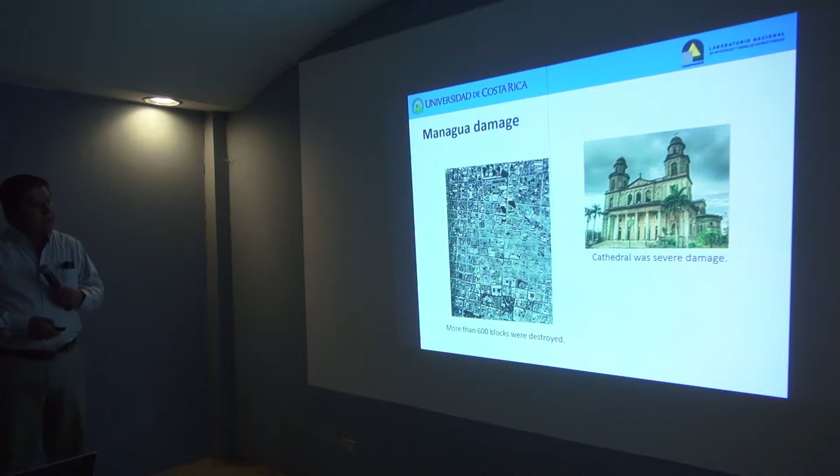Okay. More than 600 blocks in the center of the city were destroyed. The cathedral was severely damaged and still is in the same way. I was in Managua about a year ago, and you can see the cracks and everything is exactly the same. The major buildings in that area were like this, no more than 10-story height.

And for the ones that love baseball, Roberto Clemente died in that time in an airplane crash. He was bringing help to the people in Nicaragua.

We have our own earthquake in Tilarán, April 1973. Magnitude 6.5, depth 29 kilometers, 23 persons dead. The cathedral was damaged, and Tronadora is the small town right there. The Tronadora church collapsed, and it's right here. So you see, Managua is here, Tilarán was here. So it seems to me that at that moment, people felt that the earthquakes were coming to San Jose. And we decided to do something.

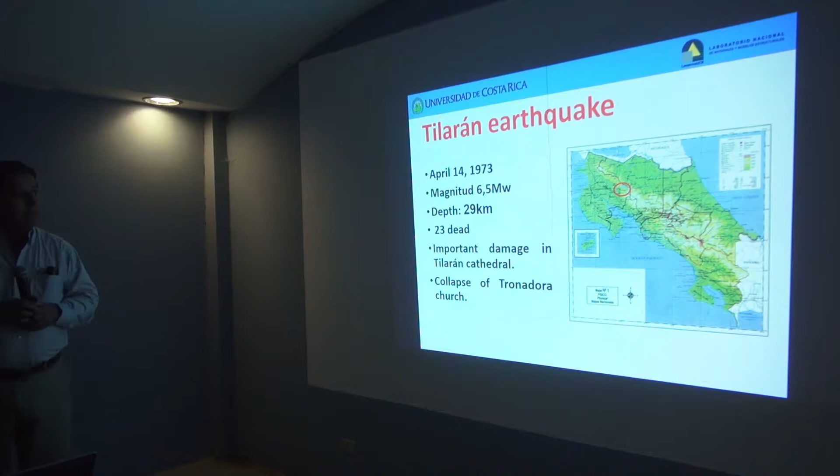At that moment, the civil engineering school had a student finishing his master's degree in Berkeley. And the easy way to produce a seismic code was telling Jorge Gutierrez, his name, find everything that you can obtain in Berkeley and try to write something. And what is really nice is in less than 1 year, we have our first seismic code. It was really interesting. In 1986, we have the second one.

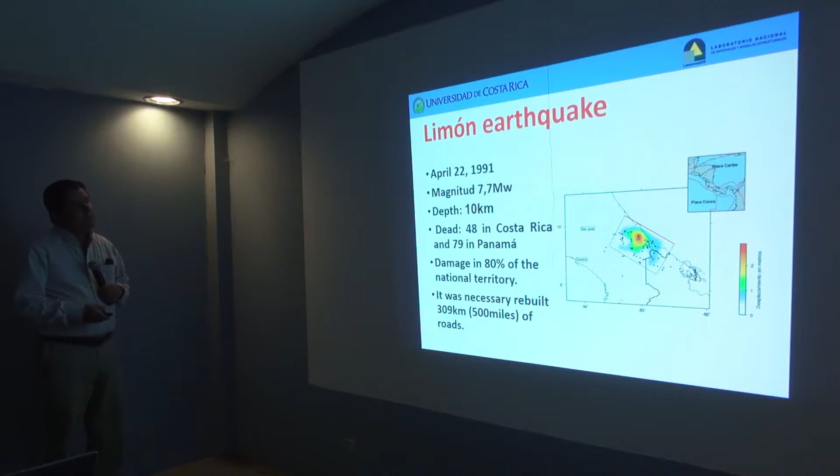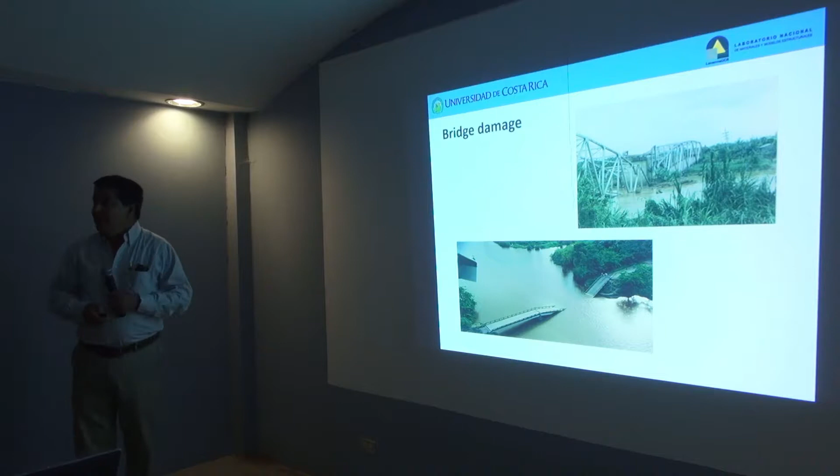The magnitude was really large, 7.7. 48 persons in Costa Rica and 79 in Panama were dead. This line is the border between Costa Rica and Panama. And there was damage in about 80% of the national territory. And we needed to rebuild about 500 miles of roads. A lot of bridge damage, infrastructure. You will see this tomorrow. Not the destruction, the road. It was not an easy way to learn about bridge design. And we have destruction in small buildings.

Okay. 2002, we have the third code, and for the first time we have commentaries. It is a completely new way to design. We introduced large changes in the masonry, concrete, and steel chapters of this code. And in 2009, we proved if that code was working or not.

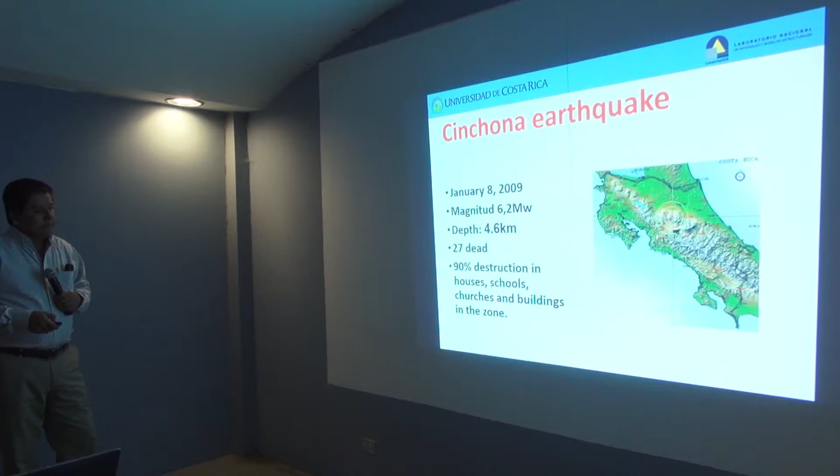We have the Cinchona earthquake. This is a rural area with a small population, small buildings, but you see the depth. Only 5 kilometers, it was at the surface. It was terrible in that sense. 90% destruction in houses, schools, churches, and buildings in the zone. And then we start learning.

We have houses like this. You will see masonry house number 1, number 2, number 3. And in this case, there was partial collapse of some walls and total collapse of some areas of the house.

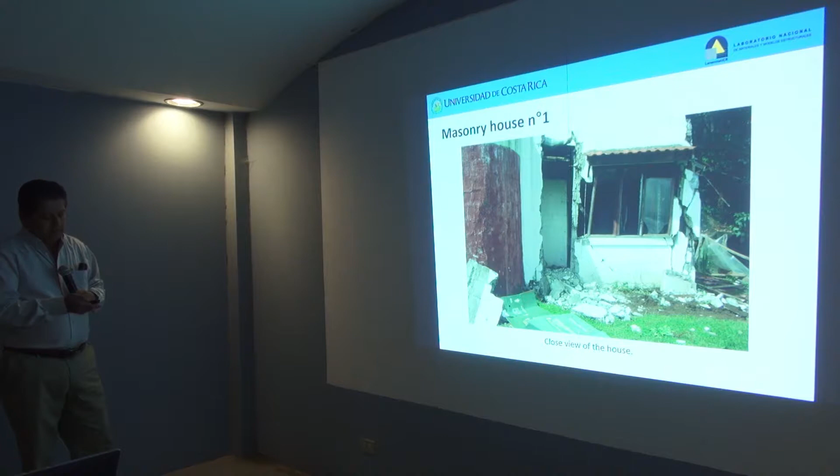Very poor behavior of the joints and the walls. And we started looking: what was wrong? The amount of walls that the house had in each direction was okay. So it was something really different. And we found these kinds of things.

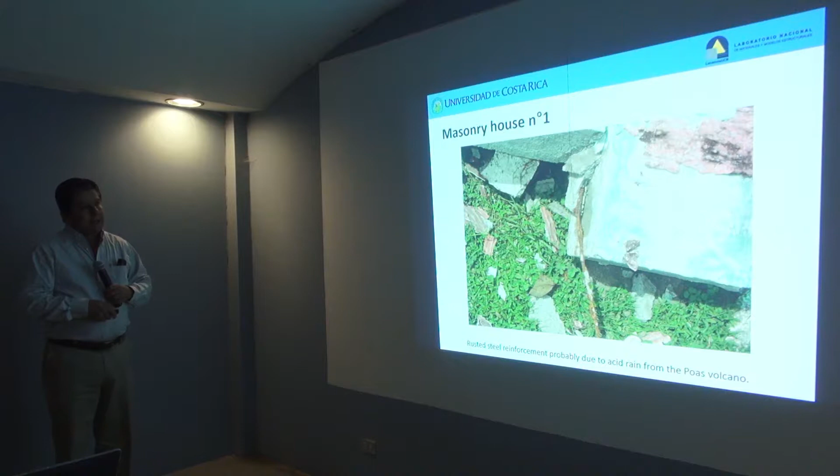The steel reinforcements inside of the masonry walls were completely rusted. And then we realized that the joints were not properly sealed. So when it rains, the water can get inside of the wall. And since these buildings are close to the volcano Poás, and we have acid rain right there, the water gets inside and starts corroding the steel reinforcement. So that explains why some walls collapsed.

It's not because they were not properly built, but the problem was the steel reinforcement was not properly placed, and there was no reinforcement at the moment the earthquake hit the house.

This is house number 2. And here we have another problem. There is no horizontal reinforcement in the wall. There is not a proper beam at the top. There is no connection between one wall and the other. And of course, we can expect this kind of behavior.

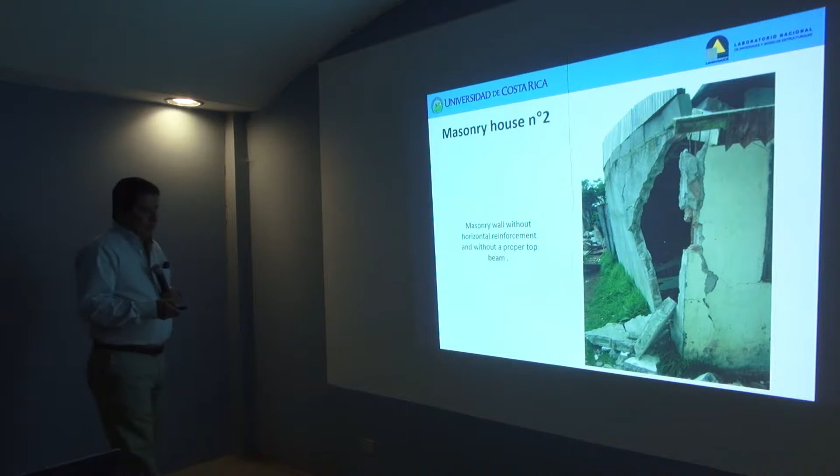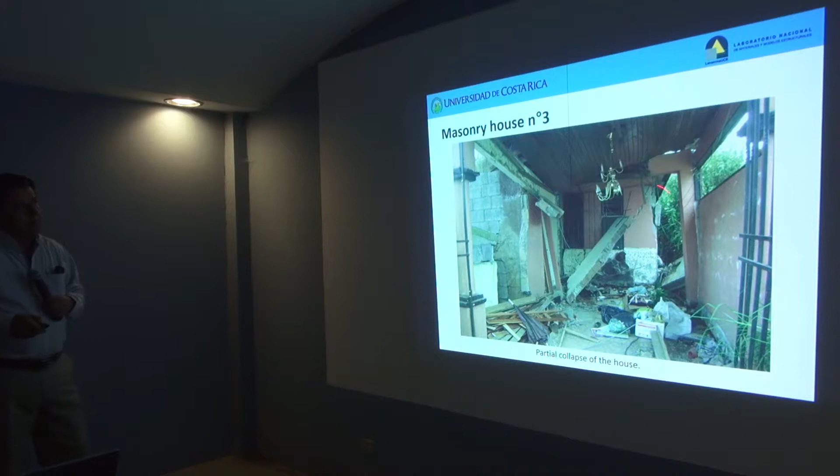This is a close look at that intersection. And you will find some vertical reinforcement, really small. And that gives you problems. House number 3, partial collapse. There were people injured in this house, and very poor details of the connections, the connection between the beam and the wall, and how the beam bears on these walls.

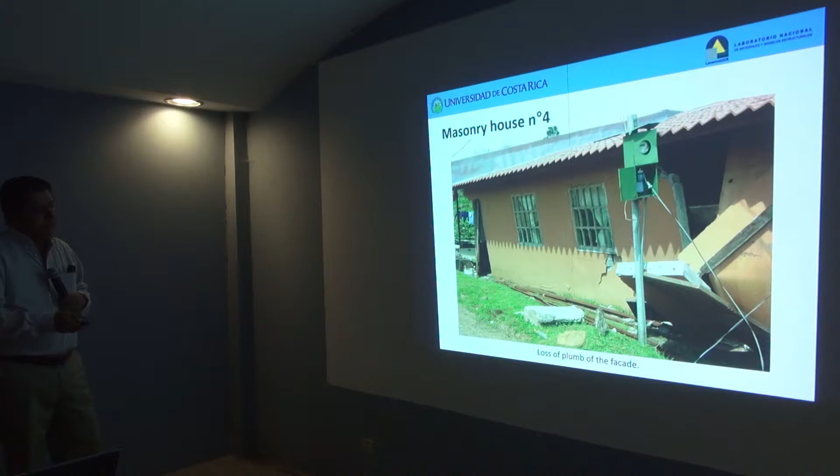Number 4, there were some pieces of the wall that were not connected to the column. And the quality of this steel reinforcement was something that got our attention, because you see the 4 steel rebars were broken. And it's not a good thing. Main road problems and soil failures in the entire area.

Silo collapse. These guys used to buy this kind of silos in America, but they bought them by cost. They were not concerned about earthquakes. I've researched this company, and they offer you low seismic silos, or medium or high. The cheapest are, of course, the lowest.

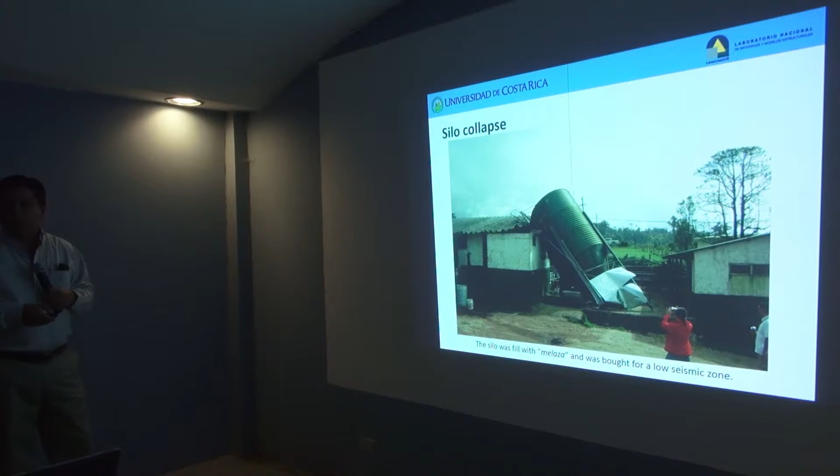So what happened is that the owners of these farms bought the cheapest silo, and these were designed for corn or some kind of thing. And instead of that, they use melaza, that is a mix of honey and other things to feed the cattle. And the weight is completely different. And of course, we found about 12 of these silos with the same behavior. Tension anchor failure at the bottom, and cold-formed steel buckling on the braced frames.

2010, we have our fourth seismic code and the commentaries. This is still in use right now. We are working, and hopefully we will have a new code in 1 year. We will try to do that.

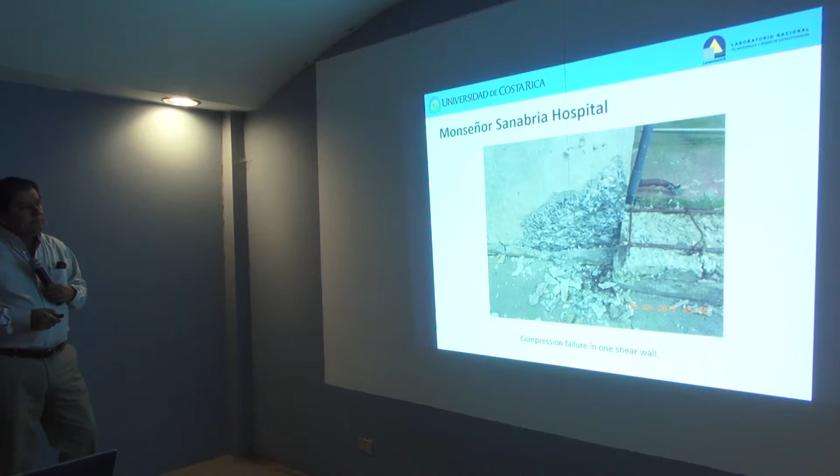8-story building. And the building originally was a concrete frame. It was retrofitted with shear walls. And this is the compression failure at the bottom of one of these shear walls. The emergency stairs have these beams and have a lot of shear crack failures. So everybody was afraid to use the emergency stairs. That's terrible.

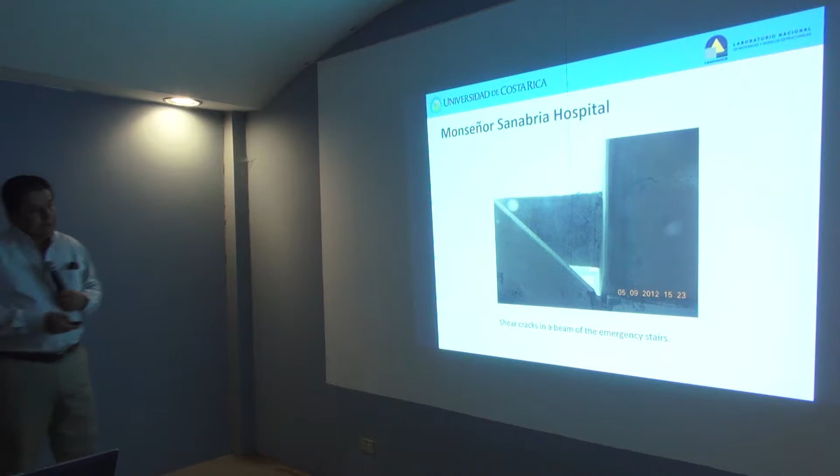The main stairs, this guy didn't understand what a proper design for shear is. You see, it's unbelievable that a beam of this height in a hospital has this kind of cracks. Okay.

The earthquake was early in the morning, about, if I remember, 7 in the morning. I was there about 3 p.m. It was chaos. There were engineers from the municipal government. There were engineers from the professional college. There were engineers from the equivalent to FEMA here. There were people from the hospital. Everybody was there.

And then I realized that I was the oldest guy right there. I tried to assign work for each one and get together. And it was difficult, but about 2 hours after that, we needed to meet with the medical staff and tell them you need to close the hospital.

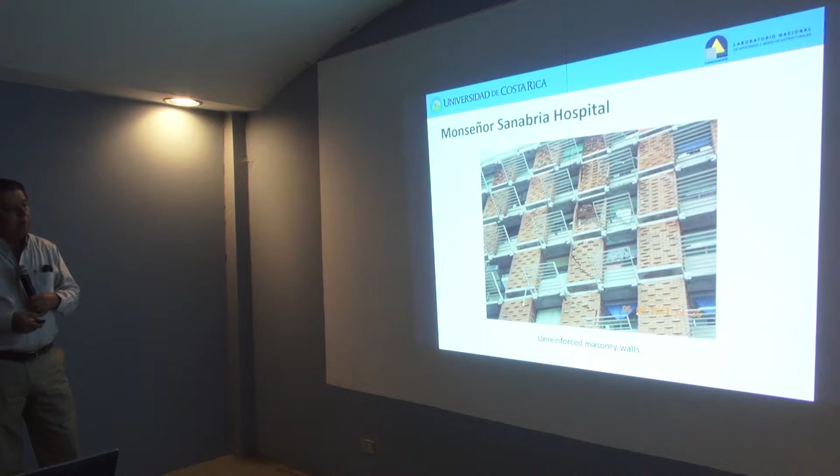After that, I received a lot of pressure. People telling me that's wrong, that's not. In the end, I made the good decision. Finally, they needed to throw out the building and start with a new one. And unreinforced masonry walls in a hospital. And of course, if there is no reinforcement, you will see all the shear behavior.

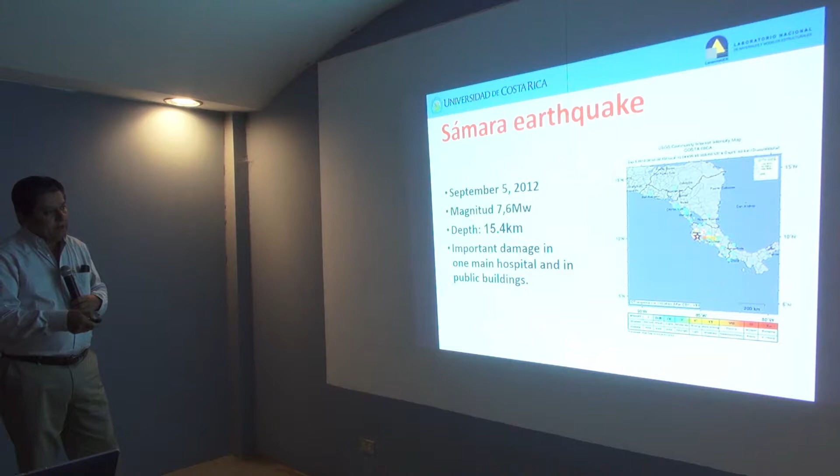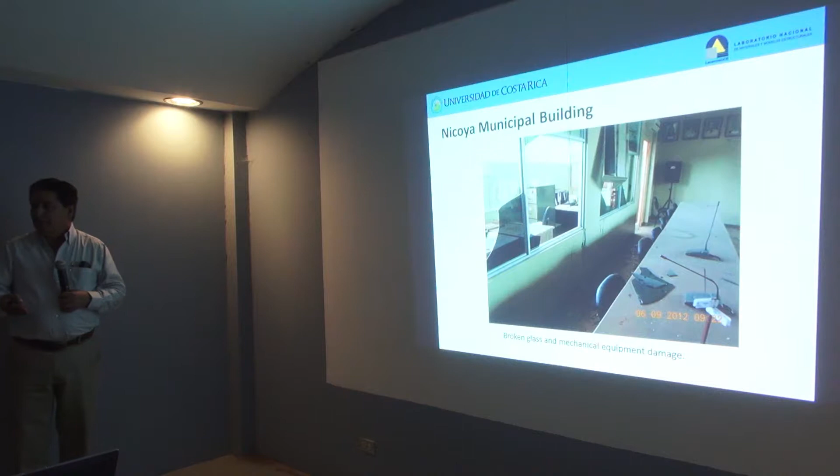This is a 2-story building where the municipal work. And it's a good example of something that we are working on right now, related to having some kind of a chapter in our code that takes care of the design of non-building structures and other things like ceilings, glass, mechanical equipment. You see, this is what we call secondary damage. It's not structural damage, but you cannot work after an earthquake with that kind of problem.

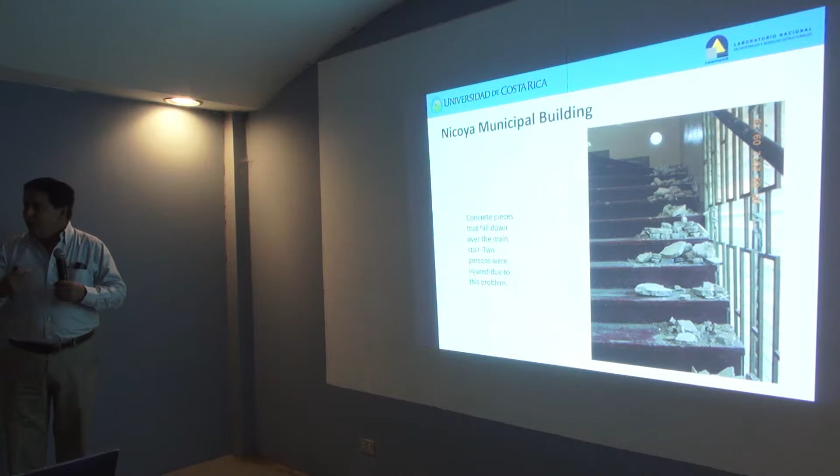There were a lot of people working in the second story. There were 2 people injured, and both of them had the same problem. They broke their arms because when they were coming down, they were protecting their head with their arms, and all these things were falling down. And a lot of broken windows that came to the sidewalk that is right here.

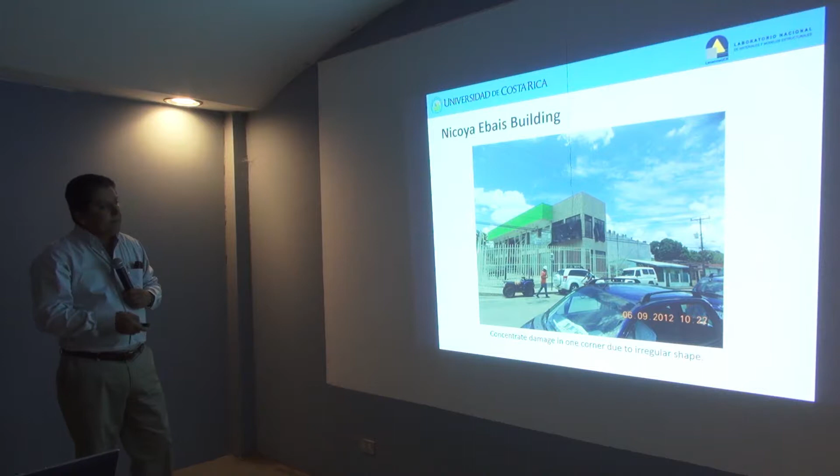This is another building in the same city, Nicoya Ebais Building, and it's a rectangular shape here. But someone had a good idea and tried to place these rooms right here in the corner. And you can see all these black pieces of plastic were there because all these glasses were broken and all the damage concentrated right here. I found the blueprints, and you see this is the corner.

It's completely irregular. So you see that when codes tell you that there is something about the regularity that you need to comply with, they are right. All the problems concentrate right here. And the rest of the building was more or less okay. So this is the kind of thing where you need to pay attention to the recommendation of the code.

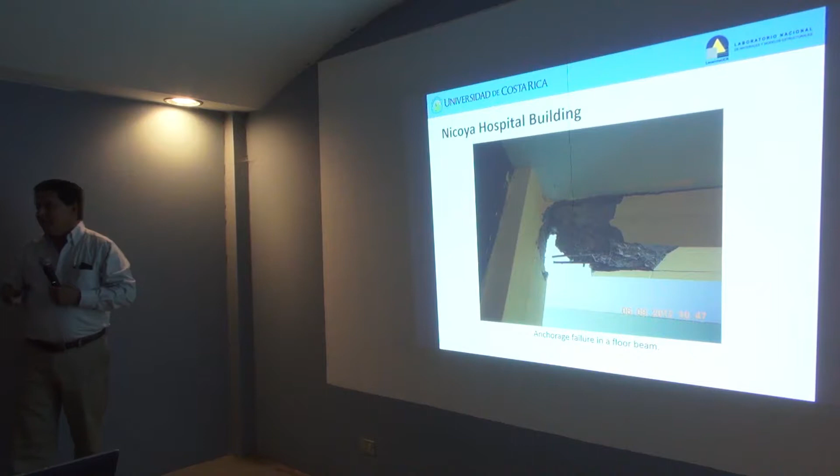Nicoya Hospital building, I call it hospital, but it's not a hospital. It's a 2-story, it's a small clinic built in the 50s without a code, with nothing, and very poor details of the steel reinforcement, and it's an anchorage failure of one of the beams, shear failure in columns. The space between the stirrups is really large.

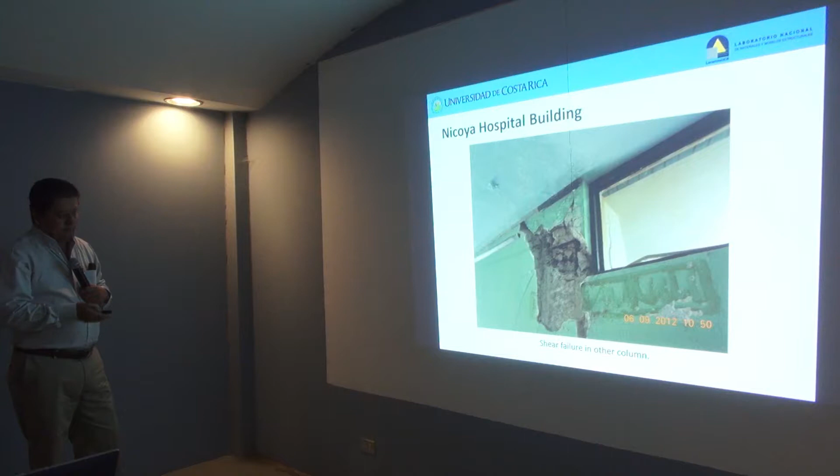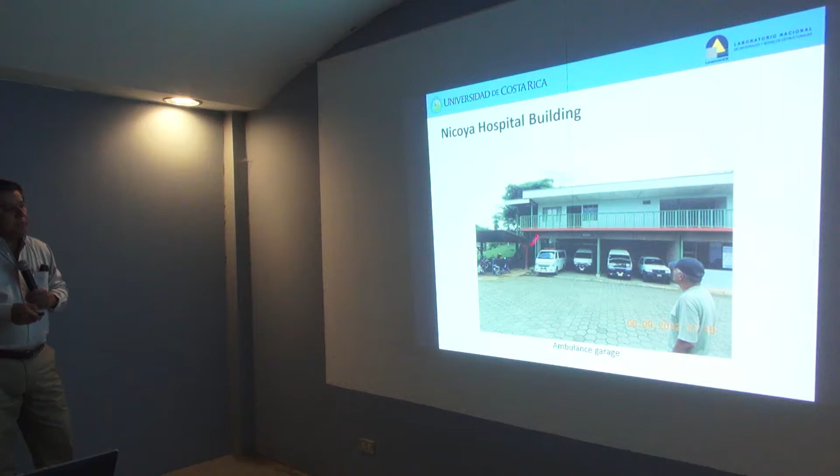This is another building. It's more or less in good shape. You will see all the ambulances here. And you need to pay attention to this beam. They have this first story, and then they decided to make a second story right there. And in order to go from here to the second, they built this stair. And in order to accommodate the stair here, look what they did to the concrete beam. This is the stair, this is the concrete beam, and this is the reinforcement.

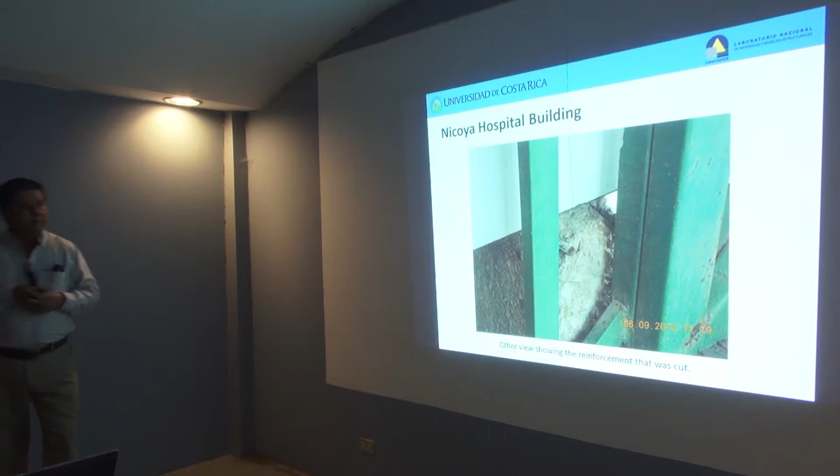They cut the beam right there. So you lose all the anchorage here. You see the rebar cut? So I'm not concerned. Well, at that moment, I wasn't concerned about the stair. I wasn't concerned about the ambulance. What happens if that beam falls down?

Santa Cruz Court of Justice Building. This is a 4-story building, and in the last floor they have this concrete frame. This is a concrete beam, but this is a concrete gutter. And the connection of this frame with the rest of the building was only through the roof system, and the steel trusses are really slender and were not properly attached to these concrete beams.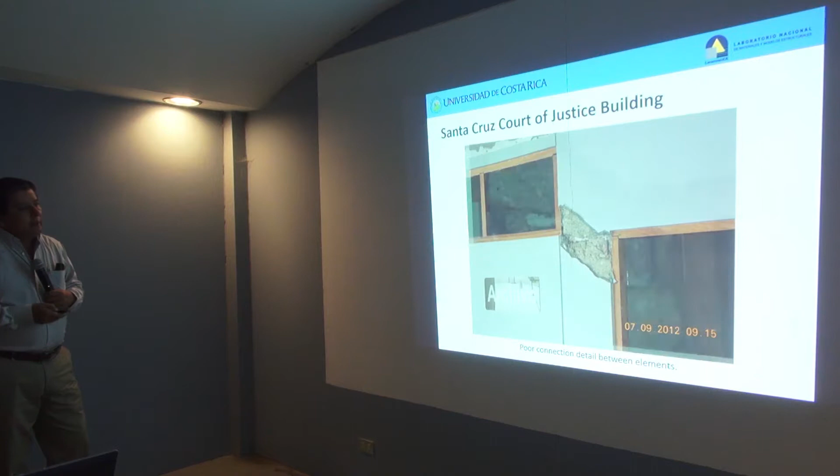Inside of the building, we found something like this. And when you have a close look, you try to understand why there is some styrofoam here. Someone had a good idea, and what about the inspection? Who was in charge of the inspection?

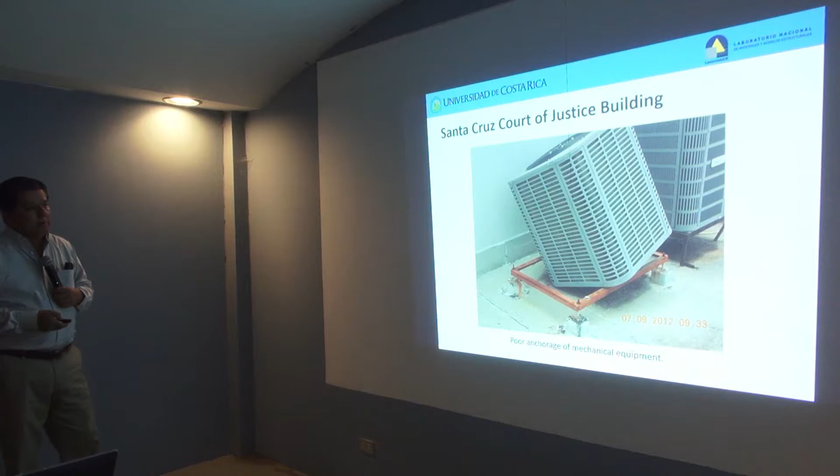Mechanical equipment, we see a lot of this. And for me, this is as important as the main structure. We need to pay attention to this kind of problem. Design of racks, design of ceilings.

Santa Cruz Municipal Building: this was originally a bank, and for some reason it finished as a municipal building. It's a very heavy structure, a concrete structure. And this is the other side. If you pay attention, this is a large element with a beam here. And this is an envelope for the stairs.

And you see here the column, the beam, and if you pay attention here, that's what you find. So you need to pay attention to how the structural elements work with the non-structural elements, how to make some kind of separation between one and the other.

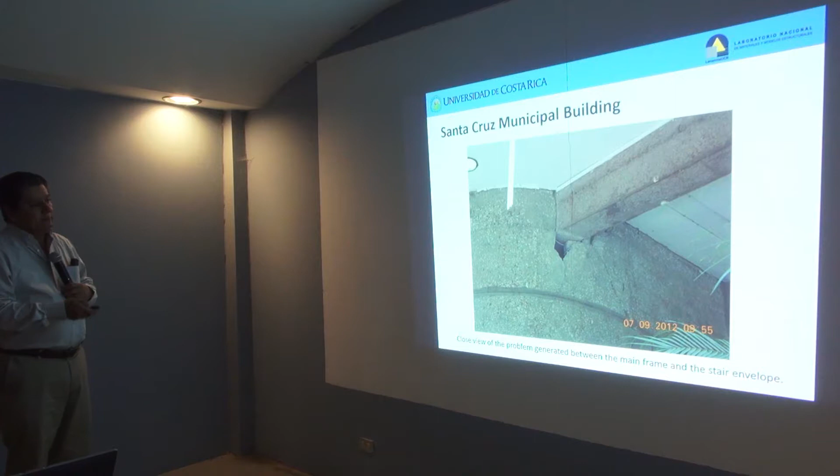And inside, you will see something really nice. This was a building that was designed by an architect. And the engineer, in this case, didn't learn the word no. Sometimes you need to say no. This is a mezzanine, okay? What we call a mezzanine is a second floor, but that piece of second floor doesn't cover the entire area, so a partial area. So this concrete beam is supported on this wall, not in a proper way.

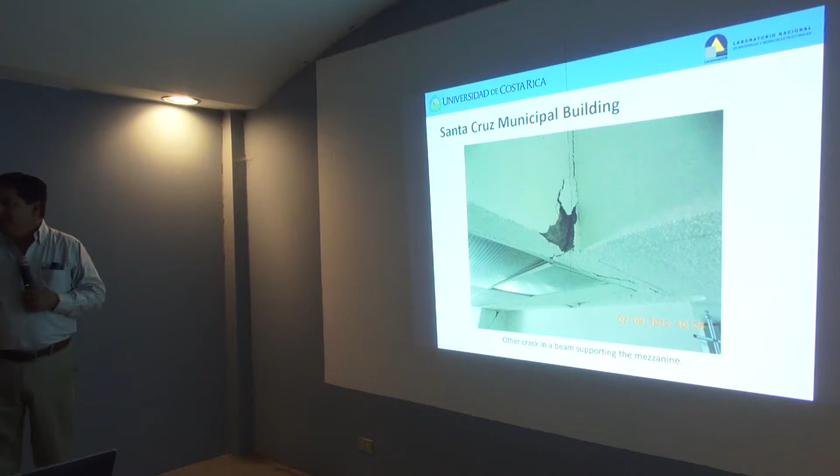You see the crack. In other places, there's a beam, there's another beam here. Something happened here. It's a vertical crack. And it's from here, but it doesn't follow the 45 degrees. And it's because the load is not applied in the normal way. Finally, we realized that this is the mezzanine and it was supported by this tension member to the roof. Terrible. It's an international sport. You see the crack.

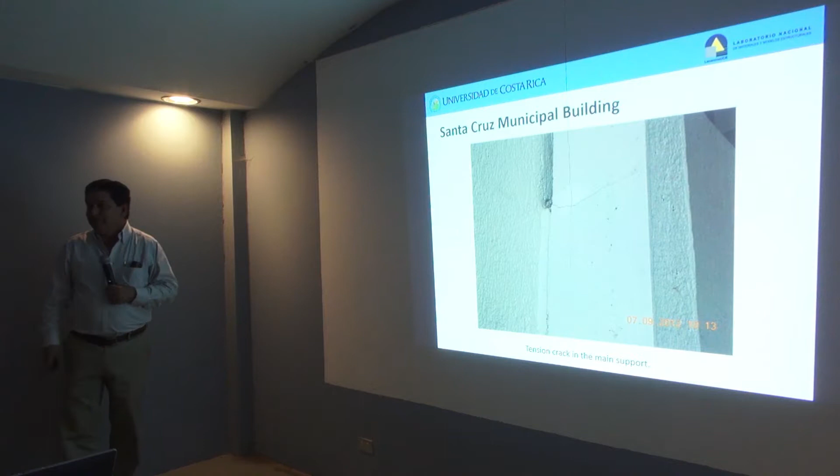And finally, in 2013, we have our first seismic code related to bridges. That's my presentation, just really quickly, in order to show two major earthquakes and why there were another two that pushed the decision to start with our seismic codes. And we are still learning, as usual. I don't know if you have any questions.

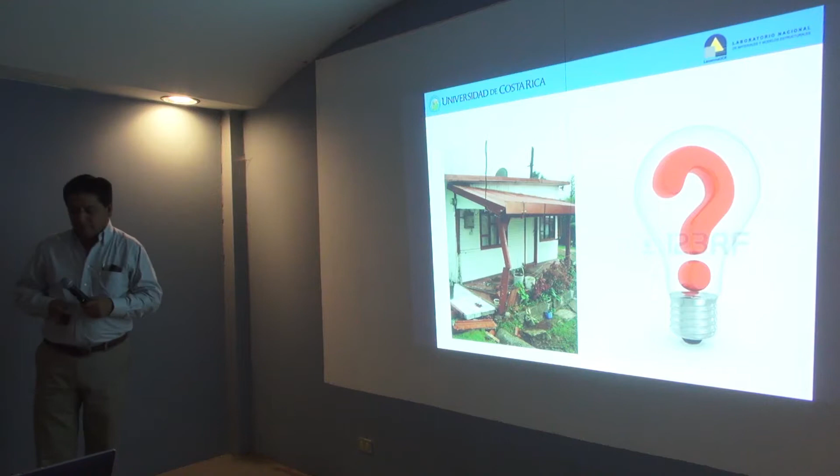Now we have the presentation from Professor Juan Caicedo from the University of South Carolina. He's going to talk about uncertainty quantification in the damage identification of civil infrastructure.

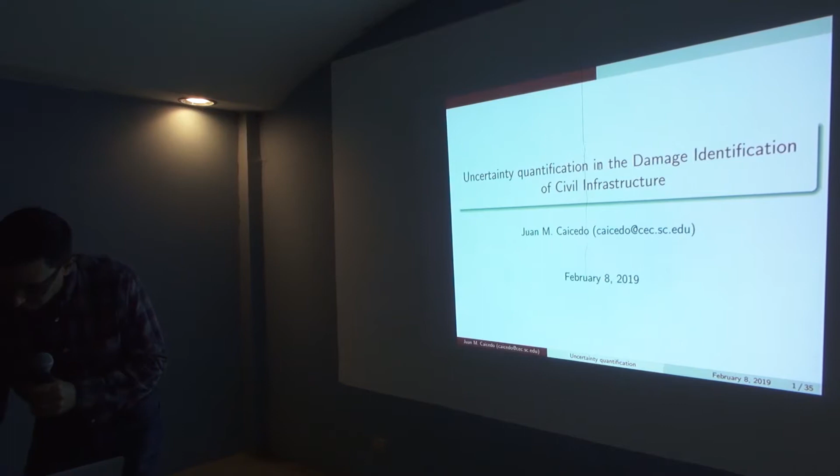Thank you very much. Oh, that's right. I need to use this. Okay. So first of all, thank you for inviting me to Costa Rica. It's been a really good visit so far. It's really a pleasure to see the similarities and the differences that we have in different countries and how that can actually help us build better infrastructure in the future. Okay, so I have a little talk here. We'll see how it goes. I understand that I am the only thing keeping you from a volcano, so I'll try to be quick.

So what I want to do is talk a little bit about uncertainty quantification, because I think as we look at all the technologies that we're thinking about, this is an important part that we need to pay more attention to. So let me start with some work that I did a while ago, modal analysis. And if you're familiar with some of the early work on this back in the 2000s, we were looking at ways to characterize natural frequencies and mode shapes when we use ambient excitation.

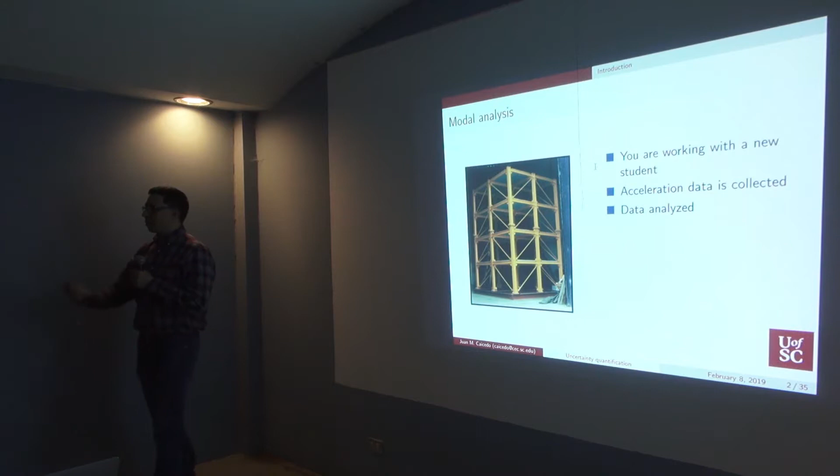So let's say that you're working with a student, and you say, okay, just to start, go and collect some acceleration data, analyze the data, and tell me what you find. And then the student comes back and tells you, okay, this is what I found: the natural frequency is 3.2. What should be your first question? What units? Yeah, very good. What's wrong with that statement? There are no units. That is exactly right. That usually happens all the time, at least with me and my students.

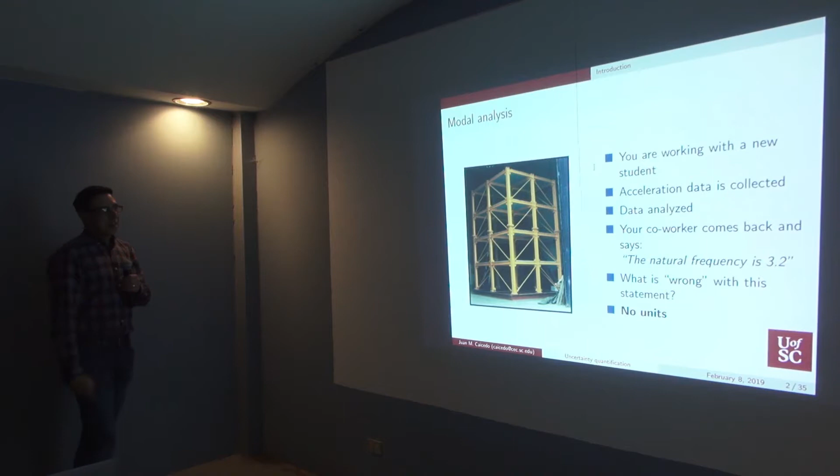Does anyone know that? What is it? It is 0, right? Because the change in stiffness is a continuous variable. It goes from 0 to infinity, or 0 to 100, I guess, in this case. It's a continuous variable. For a specific number, the probability of that number is actually 0, right? So not too happy with that at the moment.

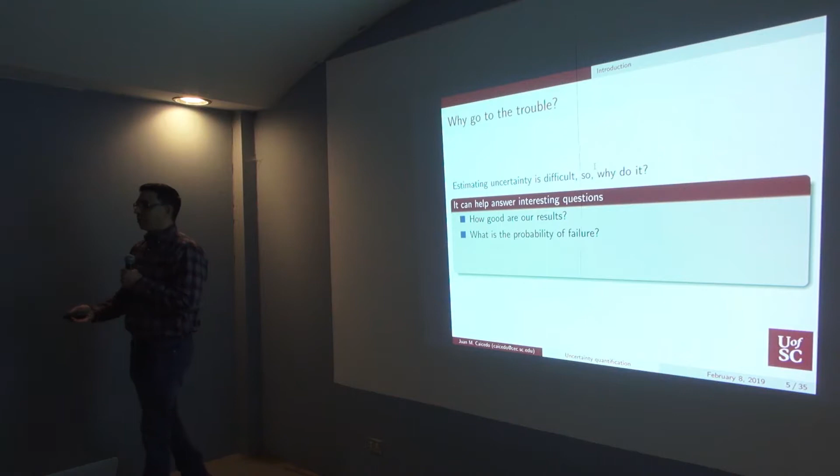And we can start asking more interesting questions. For example, instead of saying, is there damage in this structure, something more meaningful for the owner of that structure is, what is the probability of failure? So we're starting to communicate a little more clearly with the owner of the structure. So it helps us answer those questions.

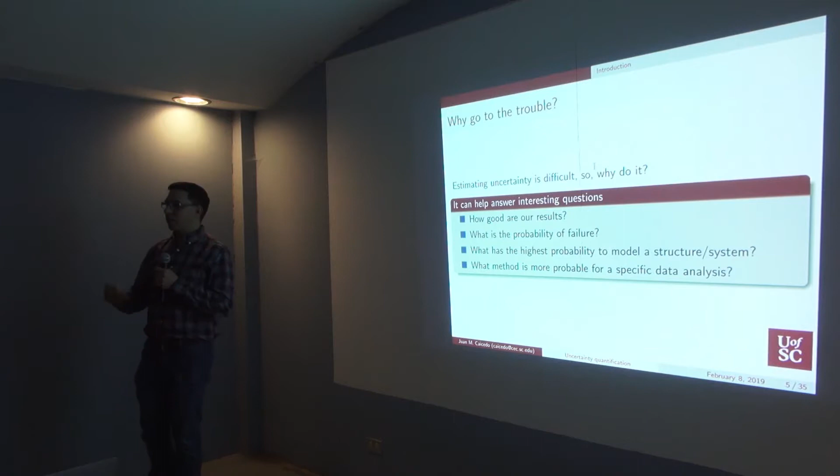Another question we can ask: I have this particular bridge. Student A develops one model, student B another, student C another. All three are telling me different things, and the data is telling me something different. What do I do? So it can help us determine the probability of a model, which of those models is more probable. And if you have different methods to analyze the data, you can determine which method is more probable. These are very interesting questions we can ask if we look at uncertainty estimation.

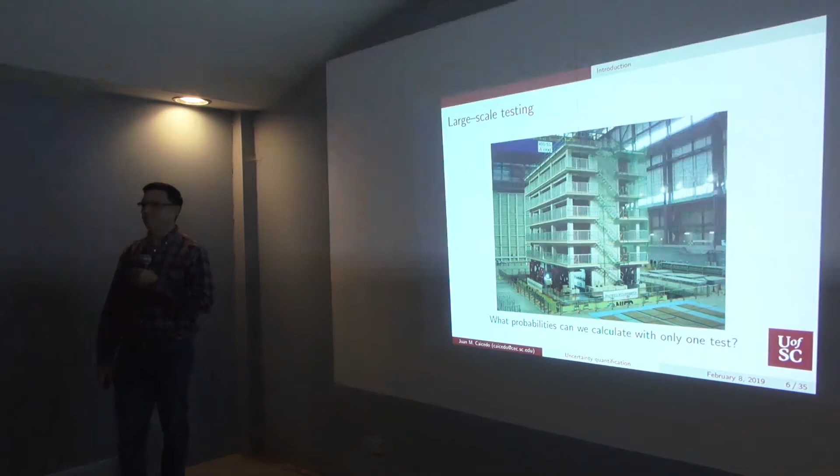So, who can tell me the definition of probability? Okay, good start. Yes, that's correct, let's keep going. Definition of probability: chances of some event to happen. Perfect. It's the chances of an event happening, absolutely correct. That's the frequentist.

I gave him a couple bucks this morning to say that, but that's absolutely right.

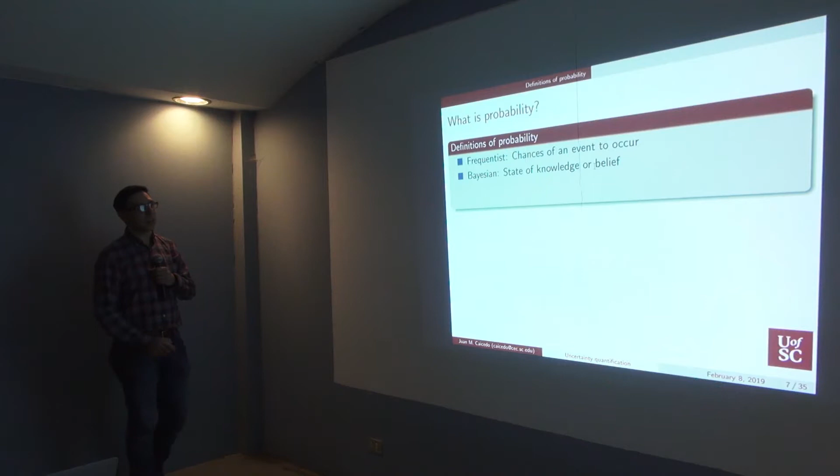So that is the frequentist definition of probability. But guess what? There is a different definition of probability, which is a state of knowledge or belief. And this is where I think we have a lot of opportunities as engineers. So let me give you an example. Let me ask you another question.

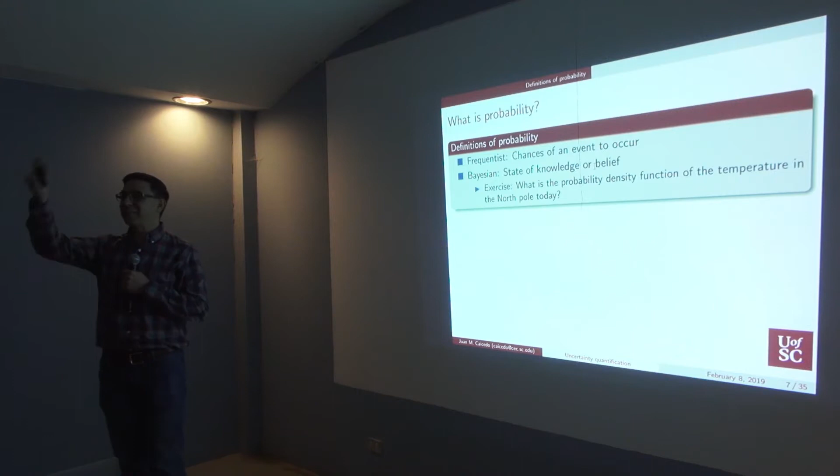Talk to someone next to you about what you think the probability density function, the bell curve, of the temperature in the North Pole today looks like. We'll give you a minute. X-axis is temperature, Y-axis is probability density. What does that look like? What temperature scale? Doesn't matter. Fahrenheit, Celsius, you choose. Kelvin. Well, there you go.

All right, let me give you 10, 9, 8. Okay, awesome. Remember, there's a volcano at the end of this talk, okay? All right, so, oh yeah, that's true.

All right, so can someone say what you talked about? Well, what does that distribution look like? It looks like a volcano. Like a volcano, that's awesome, yeah. But it's not infinite, because I don't think the temperature could ever be -1 billion. Okay, perfect, okay, good. But you have perhaps a mean? Yeah, maybe, I don't know what that is, but yeah. What do you think? Today at the North Pole? -30 degrees Fahrenheit. Negative 30 degrees Fahrenheit.

And if I'm going to push him to say, okay, you need to tell me a standard deviation. Sure, so ±10 degrees. Okay, absolutely great. That's excellent. So with that information, you can actually calculate the probability that the temperature is higher than 40 degrees, right? Yeah. Okay, let me ask you the next question. How many data points have you collected? None, right? Well, I mean, that's not entirely true. Oh, so you've been in the North Pole.

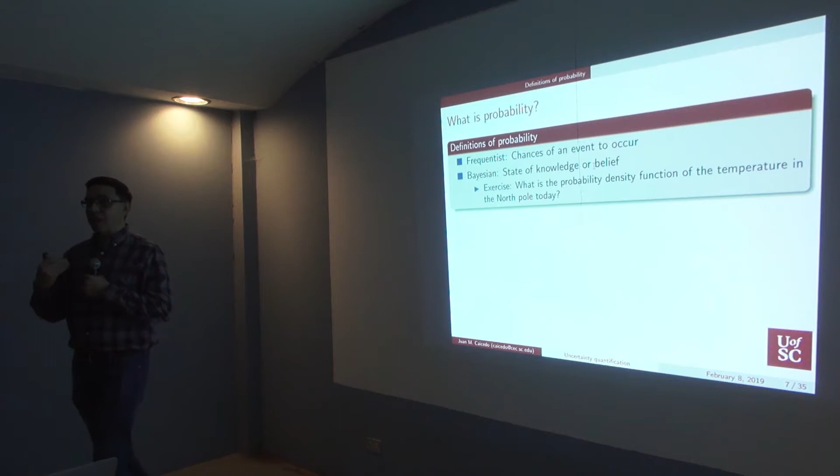Yeah, that's exactly right. But you're expressing your belief in terms of a probability, right? And that is the opportunity that we have: not everything has to be 100% data-driven. Great, if we have the data, let's use it, right? But as engineers, we have lots of experience, right? Of course, I check the temperature in the North Pole every morning, right? No, I don't, but you get the idea, right?

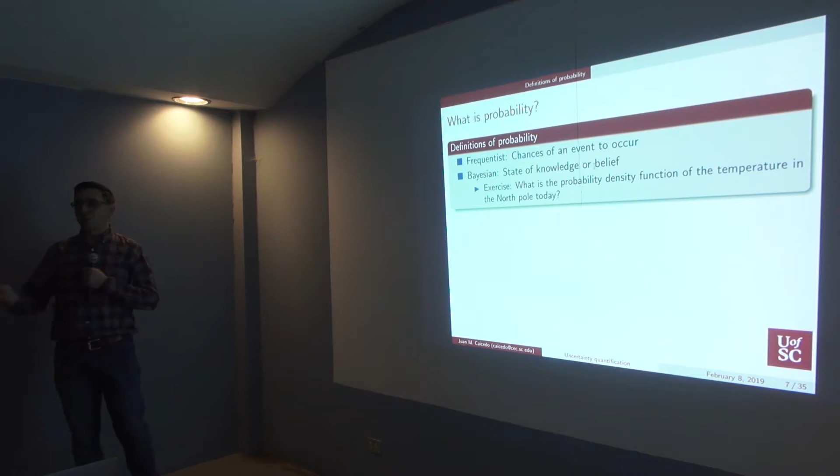Okay. So when you think about Bayesian probability, the definition of probability is different. The basics of what it represents is different. Probability is a belief. What is your belief about something, okay? When you think about the one that we learn in school, it is completely different. It's a frequentist probability, which is the chances of an event occurring, right? And because they're different, there are big changes in things as we understand them. So let's look, for example, at uncertainty.

If you go back to your statistics or probability class, you learn that uncertainty can be classified as aleatory and epistemic, and this is when everyone starts sleeping, you know what I mean? But anyway, aleatory uncertainty is something that is inherent in the experiment. You repeat an experiment 5 times, you're going to have something slightly different, so it's inherent, and it cannot be reduced, right? Epistemic uncertainty is because of lack of knowledge. So if you know your experiment a little bit better, you can measure a few more parameters, your uncertainty can be reduced, and that's the epistemic uncertainty, right? So if you follow the frequentist definition, this is true, okay?

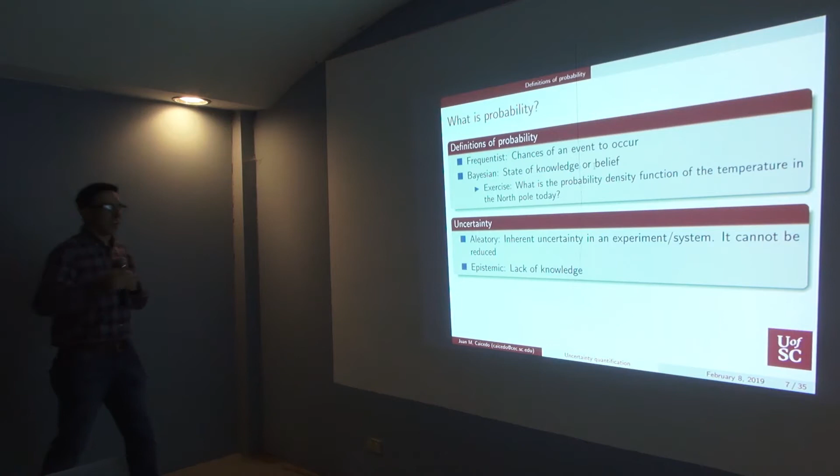If you are a full-blown Bayesian person, guess what? This is gone. Aleatory uncertainty does not exist. Does not exist. Because look at our definition of probability. It is a state of knowledge. Everything is based on knowledge, so everything needs to be epistemic. Right? Everything is epistemic. There is no such thing as aleatory uncertainty. Think about this. The typical example of the coin toss, right? So what is the probability of heads or tails? 50, right? It has been ingrained in our heads that it is aleatory uncertainty. It cannot be reduced, right? How can I reduce it?

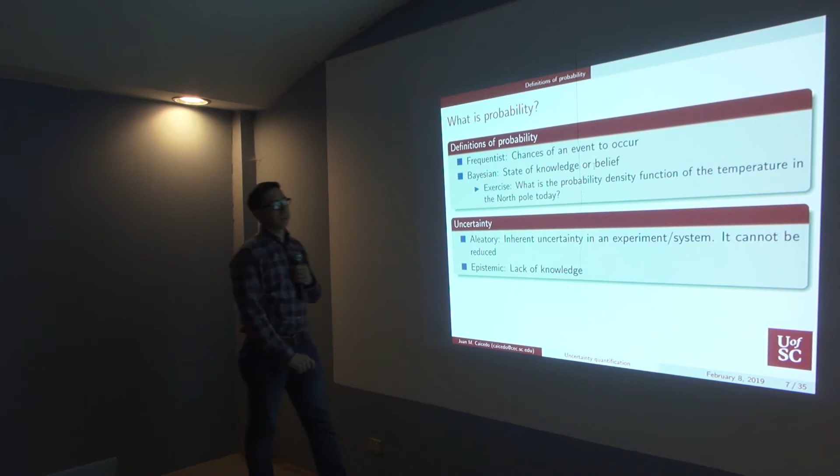Well, guess what? Now let's say that we have a way to measure the initial velocity of the coin, the initial angular velocity of the coin, the coefficient of restitution of the surface where the coin is going to bounce, right? And we have a really good model of a coin. I bet you that we can improve our chances of knowing if it is heads or tails, right? So if we look at the definition of probability as a state of knowledge, everything becomes epistemic. Everything becomes epistemic. So that's one of the biggest differences that you see between frequentist and Bayesian thinking in terms of probability.

There are other differences. I can talk for hours about this thing, right? For example, in the frequentist approach, a parameter has a true value, right? It is fixed, and data is random around that value. So for example, if you're measuring the natural frequency of a bridge, if you follow the frequentist approach, you're saying the natural frequency is a number, is unknown, right? But it's fixed, it has a true value. And the data is some type of randomness around this thing, right? It, again, comes back to this aleatory involved in there.

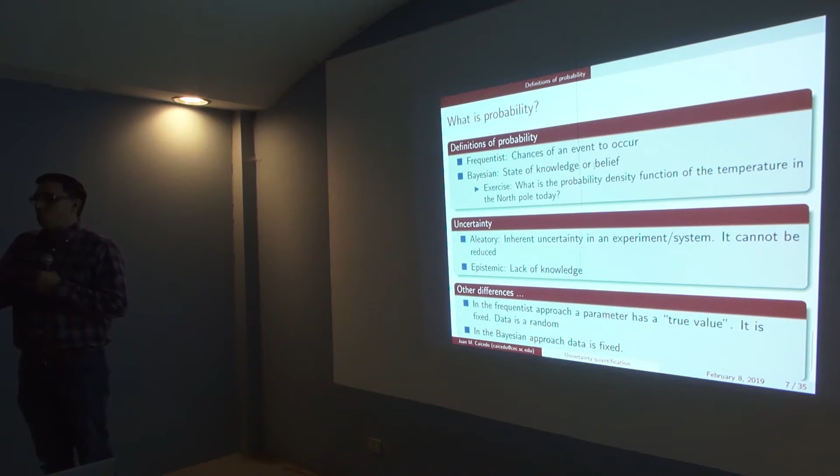But the Bayesian is backwards, actually. The data is fixed. The data is what you just collected. You made a measurement, well, that's the measurement, right? It's a fixed quantity. As a Bayesian, you say, yeah, there is a true value, but what I'm really worried about is not the true value, it's my state of knowledge about that value. And because my state of knowledge is different, now we can represent this true value. It's not really a true value, it's actually a distribution, right? It's our belief about that particular thing. So very different. Again, that has great implications in how we understand the data.

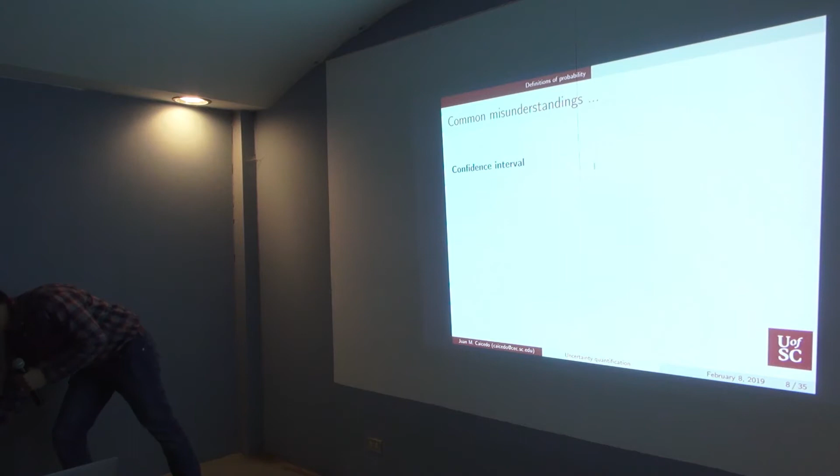One of them is confidence intervals, okay? So do the same exercise. I'm going to give you 30 seconds this time. What is a confidence interval? Go. Talk to someone next to you. Confidence interval. Okay, volunteer, what is the confidence interval? The probability that your estimate is within some bounds kind of thing. Very nice, very nice. You guys are so predictable.

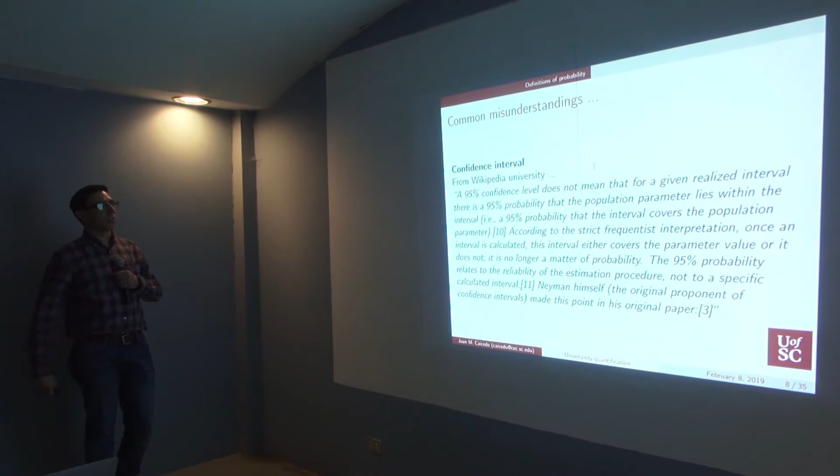So this is what Wikipedia University says. Okay, Wikipedia University says, well, a 95% confidence interval or a confidence level does not mean that for a given realized interval, there is a 95% probability that the population parameter lies within the interval. What that means is, if you have a confidence interval that your frequency is between 1 and 2 hertz, that does not mean there is a 95% probability that the true value is in there. That is actually not the meaning of a confidence interval. What it means, really, is that if you repeat the process 100 times, right, that interval will be there 95% of the time. It's completely backwards from the way that we understand things as engineers, in my opinion.

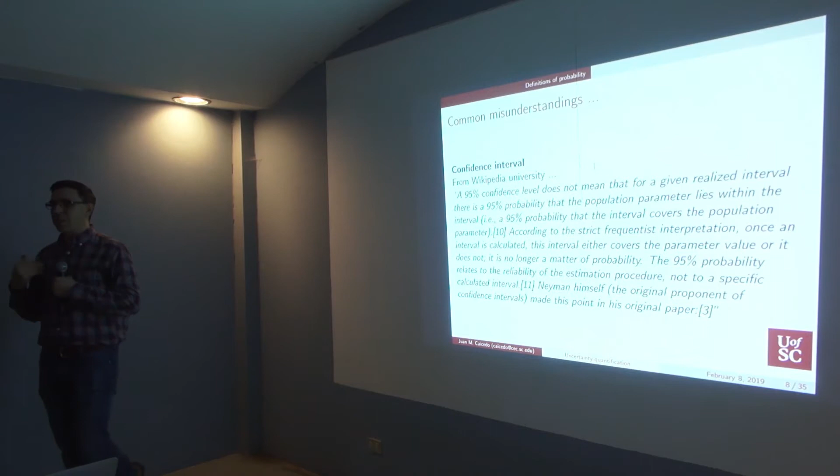So let me ask a different question. Credible interval. Have you guys heard of this? This is the interval that now you have a 95% chance that your thing is in there, right? And you can arrive at a credible interval if you think about this as Bayesians, which is about the state of knowledge. If you go back to the confidence interval, look at what's happening. We go back one more slide, or maybe two. We said, hey, this thing has a true value, right? The parameter has a true value, right? So we cannot say that there is a 95% chance that the value is in the confidence interval, because there is a true value, so either it is or not, right? If you think about probability as a state of knowledge, now you can actually say, hey, there is a 95% probability that it is there, and that is the credible interval.

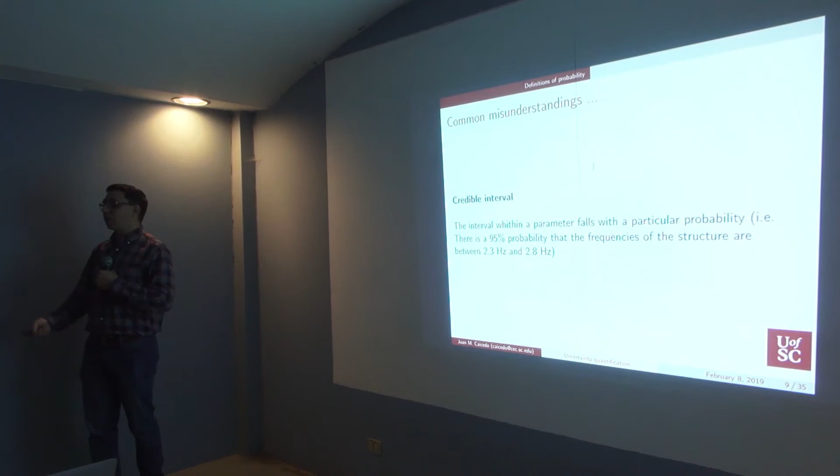Does that make sense? I know it's convoluted, but just trust me. The credible interval is what most people think of as the confidence interval. Confidence interval is not really how we treat it in most cases. By the way, there are several papers that actually talk about how scientists mix these two concepts, right? And that actually can have serious consequences in some cases. All right, so questions, we need to have questions, right?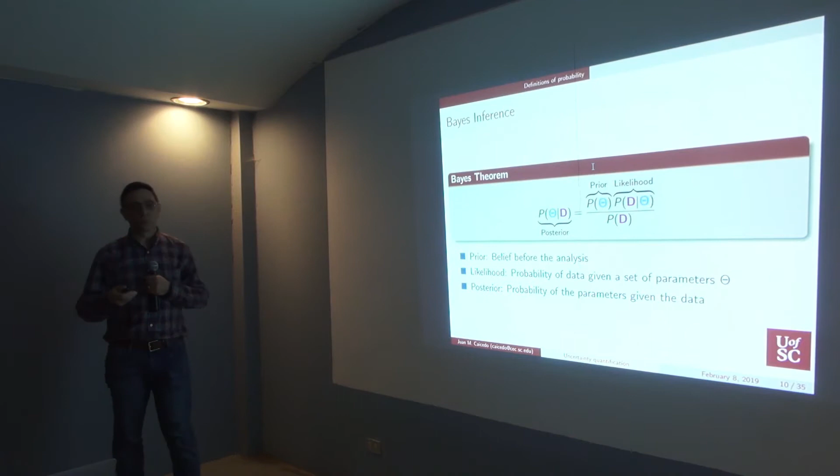When you start looking at probability as state of knowledge, what you can do is you can now better estimate your uncertainty with data, right? And you can do that through this equation. So what you see here is your theta is whatever parameter you're trying to determine, okay? Just think in your own field, whatever parameter you're trying to determine. D is your data, whatever data you're collecting about that particular system. And this over here is what's called the prior, and this is your original belief. This over here is called the likelihood, and it is the probability of the data that you collected given a particular set of parameters theta, okay?

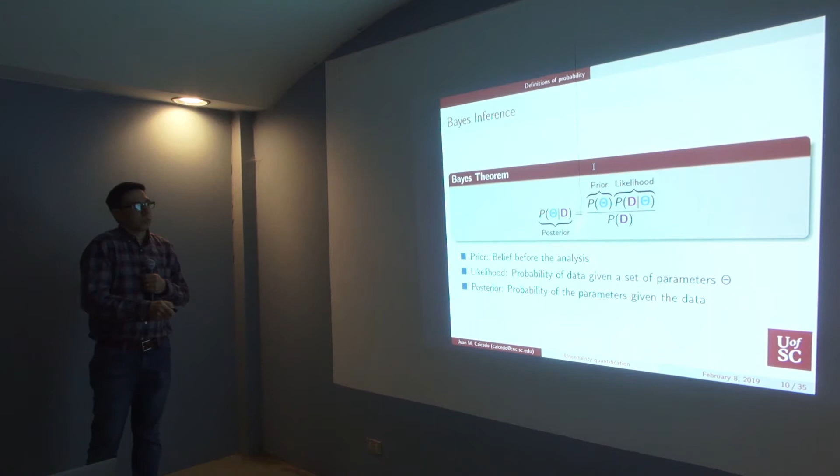And what you end up with at the end of this process is an updated value of the probability of your parameters. So now you have a probability of your parameters theta informed by the data D at the end of the process, right? Very important to realize, hey, this is a prior. It's a prior. The belief of the person or the group of people doing the analysis is always embedded in the analysis, okay? So when you read a paper that is Bayesian, please understand that not all of that is data driven.

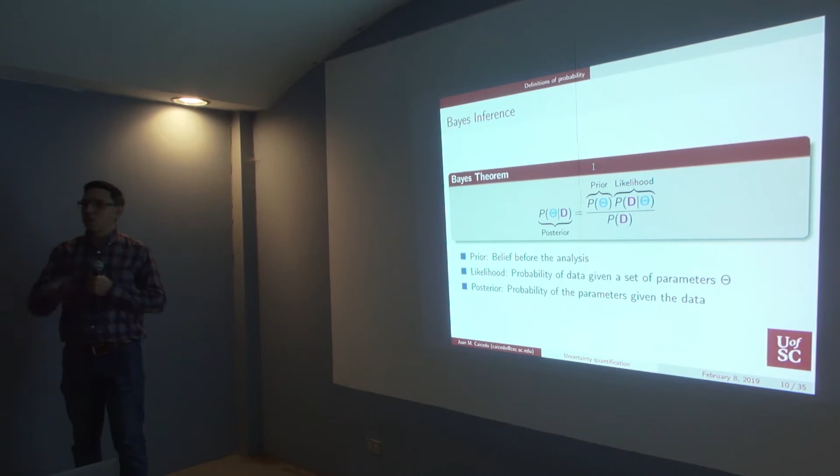There could be a little bit of bias depending on the experience of the person that is doing the analysis. I will argue that that is actually something good for us as engineers. Because as engineers, we collect all the experience through life by looking at damage and earthquakes and all those things. And why are we throwing that information away? We should be using that experience in our analysis, right? We have experience and we should be able to incorporate it in those prior distributions.

By the way, you can do things that are a little bit more complicated just by playing with the same equation. You can calculate probability ratios of models. So if you have model A, finite elements, and model B, finite differences of the same phenomena, you can calculate the probability ratios between those two models. And that can help you choose which model to use for subsequent analysis, or you can use both models, and you believe each model a certain amount, basically, right?

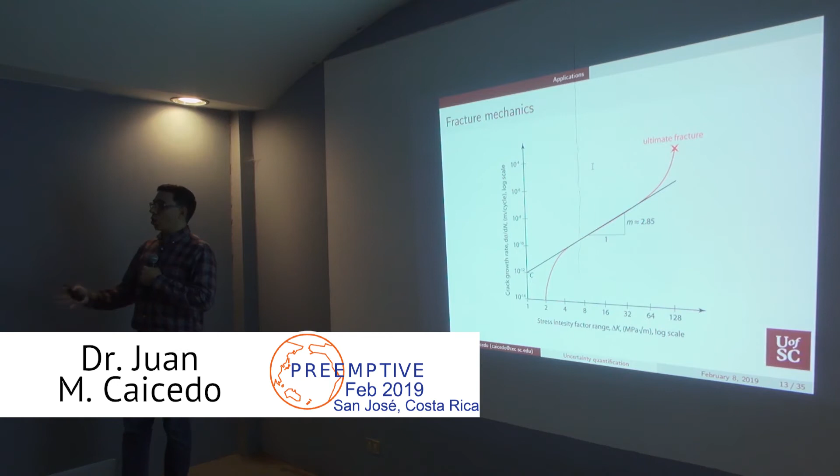And then when you look at fracture mechanics, there is a law called Paris' law that tells you the speed at which the crack grows is in this axis, and the stress intensity factor, related to the changes in stress in each cycle, is in this axis, right? So as an engineer, you want to keep track of this crack growth. If your crack growth is somewhere around here, maybe you're not too worried. Even if you have a crack, it's a stable crack. You can predict how much it's going to grow in a year, things like that. Not to worry.

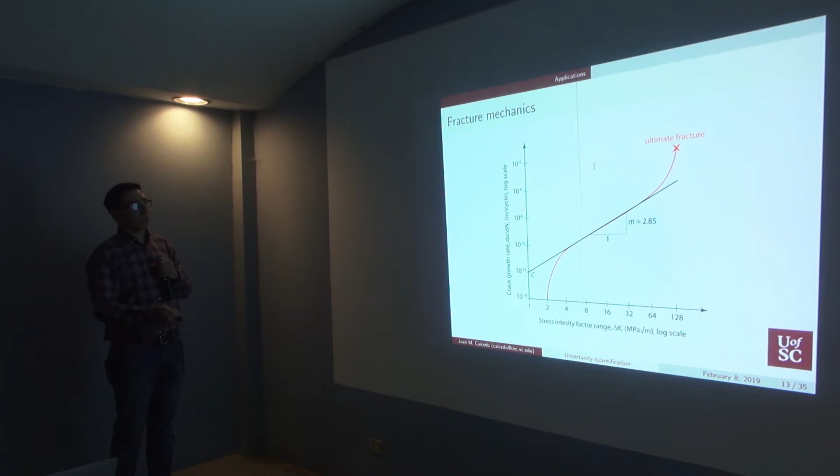This is what is called initiation. This is called stable crack growth, and this is where problems are, right? This is the unstable part of the crack growth. So as an engineer, what I really want to know is, where am I here? If I'm somewhere around here, maybe I can manage the problem. I can defer maintenance for a couple of years, and that's okay.

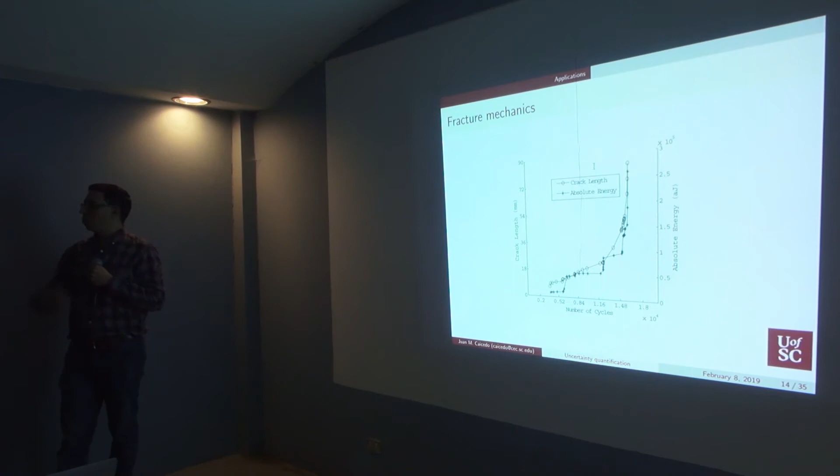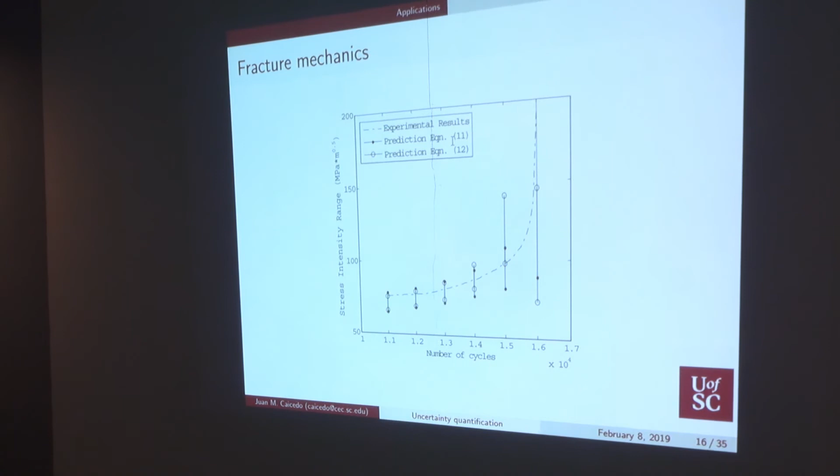So instead of getting just one number, I get a distribution, and we can actually draw distributions from this. So I get a credible interval, and at the end I say, okay, something really bad is happening. I cannot trust the model anymore. I better go check the bridge, right? That's one of the advantages of using uncertainty in this type of analysis.

The source, in half of what I'm going to show, was simulated, and the other half is created by what is called a pencil lead break. So you take a pencil, you break the lead on the specimen, and the acoustic emission sensors capture that energy. By the way, I think that is an ASTM standard. So you actually have to use a specific type of lead. It has to be that long. They actually sell the pens, that is fancy stuff.

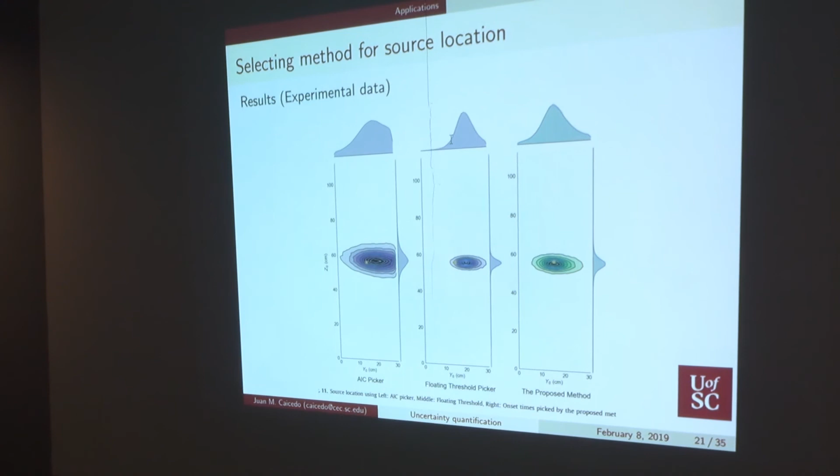And when you combine the two methods, right, and let the method tell you which one to select for each sensor, it's much better. It's actually not biased, and not as narrow as this, but it's at least not biased, right? Again, in this case, we were able to use this uncertainty estimation to guide us into what method to use for the data analysis.

Anyway, I'm going to go through this relatively quickly. Let me just pass this. This is another example, a much simpler example. We have a two-story building. We're just trying to determine what's the mass of each floor, with only one sensor. If you do it with only one sensor, you get the case where you have two areas of high probability density. Here on the x-axis is the mass of the first floor, and the y-axis is the mass of the second floor.

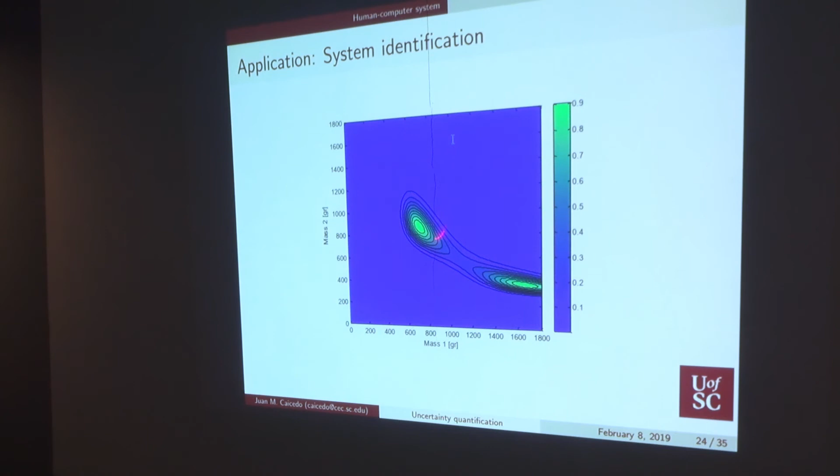So what do we do? We go back and look at the picture. Right? So which of these two peaks do you think is a better explanation of the experiment? This one or that one? Based on this picture. First one, why? Yeah, they look about the same, right? Okay, now we include that information into our analysis, and then we get much better results, right?

The point that I wanted to make with that little example is I also think that we're trusting methods too much, and if we just let methods run by themselves, they might give us the wrong answer. If we try to combine the experience of people with what the data and the methods are telling us, we might be able to do a little bit of a better job than we might be doing now.

All right, so let me tell you about some opportunities in terms of these protective systems. One of the things that I've been thinking about is how can we use all this sensing and this actuation for different things. And one of the things that we've been doing for the last few years is use the structure as a sensor. This is a term that Hae Young Noh from Carnegie Mellon is kind of coming up with. But the idea is we already have some sensors in the structure. Can we actually look at the vibrations of the floors, put some algorithms to this to determine some type of health status of that person, right? So there might be some opportunities for the same techniques, the same sensors that we're using, to do something slightly different.

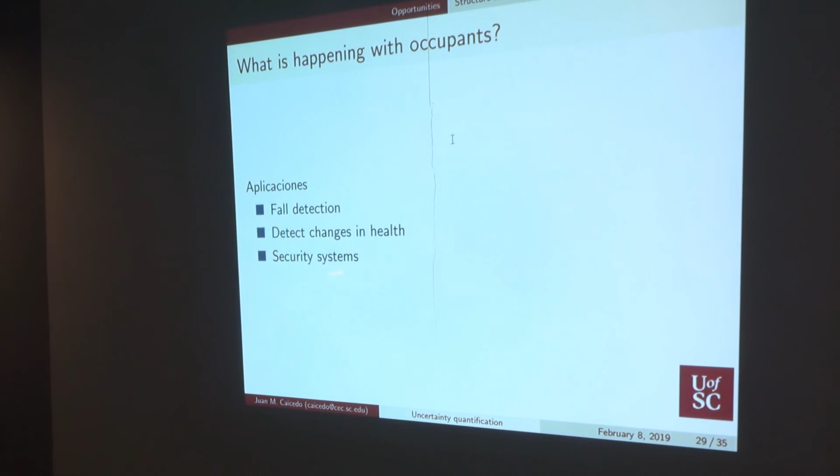Notice that this does not have uncertainty yet, so I'm still not happy about it. We need to include uncertainty on this type of analysis. But it's encouraging because now, if we can measure the force of impact, we have a better idea whether or not the impact was created by me dropping the microphone at the end of my presentation or grandma falling down, right? So this type of technology hopefully will help us do that.